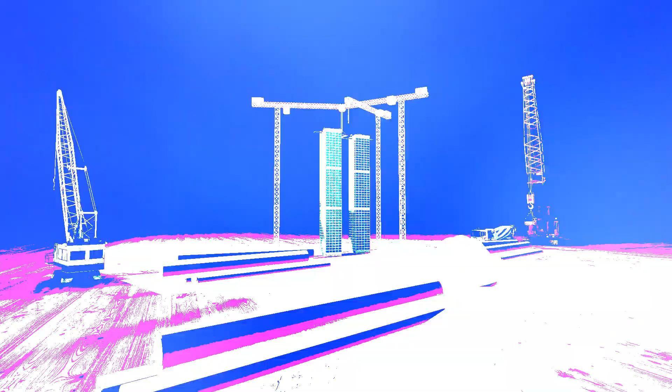Today, we'll be diving deeper into this topic and exploring some other high-cost blunders. So, if you're interested in watching more about the world's most expensive mega construction mistakes, stay tuned. We are sure that you will find this episode to be very informative and entertaining. Let's move on to the video.

It's the stuff of nightmares. When mega construction projects costing billions of dollars go wrong, the consequences can be catastrophic. From towering skyscrapers to enormous bridges, these are the world's most expensive mega construction mistakes, and the stories behind them will shock and amaze you.

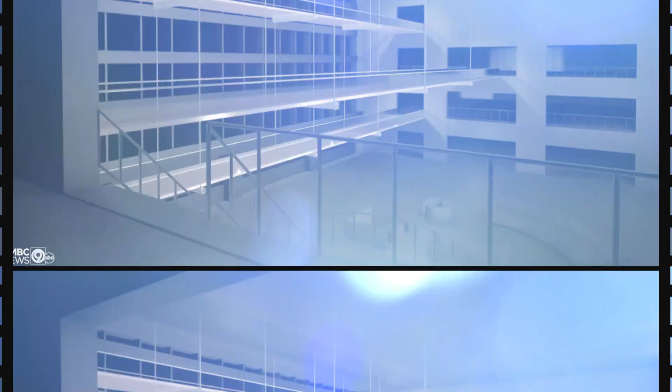The Hyatt Regency in Kansas City, Missouri, was a sleek and elegant hotel that opened in 1980. It boasted a multi-story atrium with 3 suspended walkways running through it, anchored by 1.25-inch steel rods. Unfortunately, an error in the construction process went unnoticed, resulting in a catastrophic event.

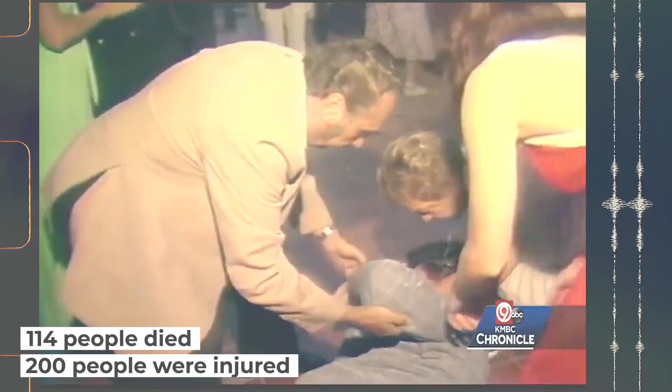On July 17, 1981, the 4th floor elevated walkway collapsed, resulting in the death of 114 people and the injury of an additional 200 people. The Hyatt Regency hotel owners paid more than $140 million in compensation to those affected by the walkway collapse. The collapse occurred during a Friday night tea dance in the lobby.

Witnesses described a horrific sight, with the walkway falling down onto another walkway 2 floors down, and eventually into the lounge below. Local police chief Norman A. Caron said it was the worst disaster in his 25 years as a police officer. The cause of the tragedy was an engineering error in the design of the walkways.

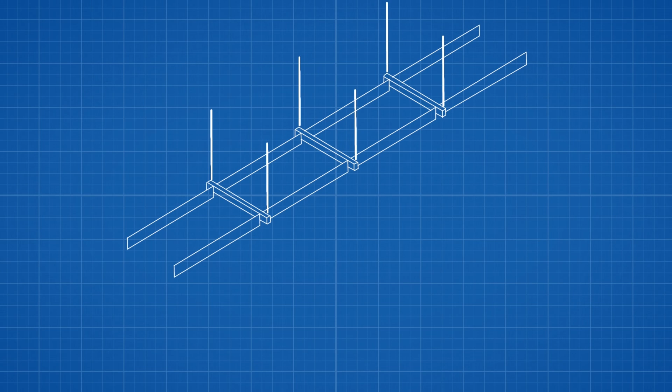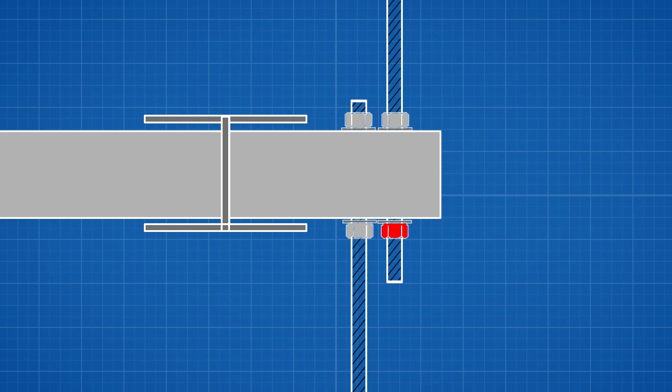In an effort to save money, the design was changed from a single set of hanger rods threaded through the upper walkways to a double rod system that was anchored to the upper walkways themselves, adding immense and undue stress. Unfortunately, this change was not noticed before the walkway was built, and the design was not able to meet the minimum safety requirements.

The event at the Hyatt Regency was a tragedy that should never have happened. It serves as a stark reminder of the importance of safety and quality control in construction. It also serves as a reminder of how a seemingly small oversight can cause disastrous consequences.

The John Hancock Tower in Boston is a prime example of a mega construction mistake. Initially, the plans for the tower prompted public outcry due to its shadow being cast over Trinity Church. Despite a redesign of the building, this did not prevent further issues. During construction, the blue reflective glass used on the building started to fall off from various heights, forcing police to close off the area around the building.

Subsequent research in wind tunnels identified additional integrity issues, such as twisting in high-power winds. The real issue, though, was that the building expanded and contracted wildly due to differences in temperature inside and outside of the building. The reflective material caused the glass to be stiffer than expected, and instead of absorbing motion, it transferred it and simply shook out of place.

All 10,344 window panes had to be replaced with single-paned, heat-treated panels, driving up the cost of the project. During the time it took to identify and fix the problem, sheets of plywood replaced many of the missing panes, earning the tower its nickname of Plywood Palace.

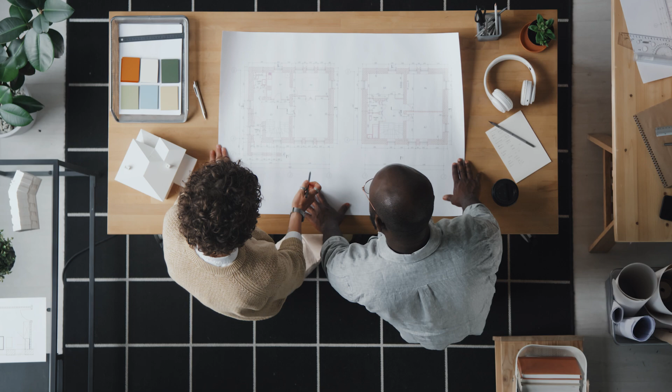The John Hancock Tower ended up costing $175 million, making it one of the most expensive mega construction mistakes in history. Despite the costly errors, the tower still stands today as a testament to the power of human ingenuity and engineering. It serves as a reminder of the importance of investing in proper research and testing before embarking on a construction project. The John Hancock Tower is a prime example of the costly consequences of cutting corners.

The Kemper Arena in Kansas City, Missouri, is another of the world's most expensive mega construction mistakes. The arena was built with a price tag of $39 million in 1974, but its lifespan was cut short after just a few years when the roof collapsed in 1979 due to poor design and engineering.

The arena was hailed as an innovative design at the time, but it was ultimately doomed by a case of form over function. The roof was flat, which raised some concerns as to how it would handle the weather. As such, the design included a temporary reservoir to reduce stormwater runoff, but it only had 8 drains, despite local code requiring at least 8 times as many. As a result, the reservoir could only contain 2 inches of rain before overflowing. On the night the roof collapsed, a storm dumped more than double that amount of rain.

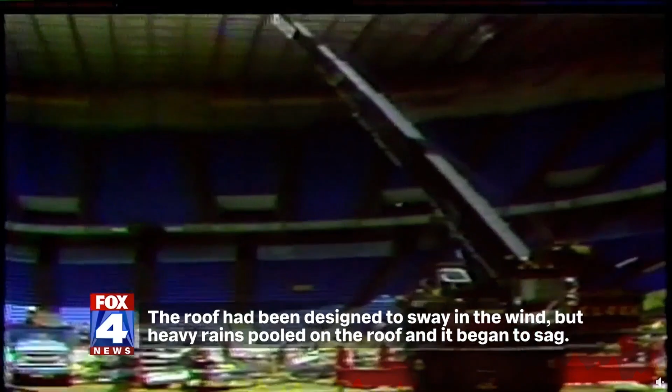The collapse was so violent that pressure from the falling roof blew out some of the walls. The damage from the collapse was so severe that the arena was closed for repairs for more than a year. After the repairs were made, the arena was reopened in 1981 and renamed the Kansas City Community Arena. It was eventually renamed again in 1988 to the Kemper Arena.

Since then, the arena has hosted a number of sporting events, concerts, and other events. It has also been remodeled several times over the years and is now home to the Kansas City Mavericks, a minor league hockey team. Despite the changes, the arena still serves as a reminder of the dangers of form over function in construction. The collapse of the Kemper Arena has been estimated to have cost more than $20 million in damages, making it one of the most expensive construction mistakes in history.

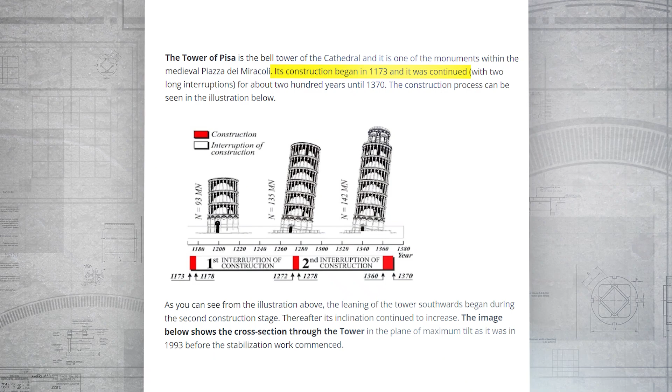The Tower of Pisa, otherwise known as the Leaning Tower of Pisa, is one of the most renowned and recognizable structures in the world. The total cost of the project exceeded €30 million. This iconic building stands as a testament to human ambition, as well as a reminder of the importance of proper engineering. The tower was initially constructed in 1173 as the bell tower for the Pisa Cathedral complex, and was intended to be an 8-story structure.

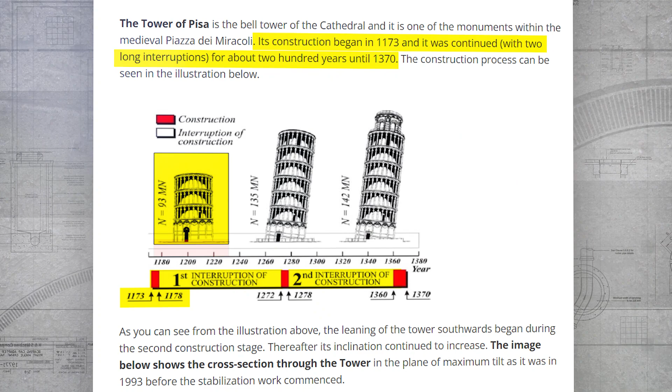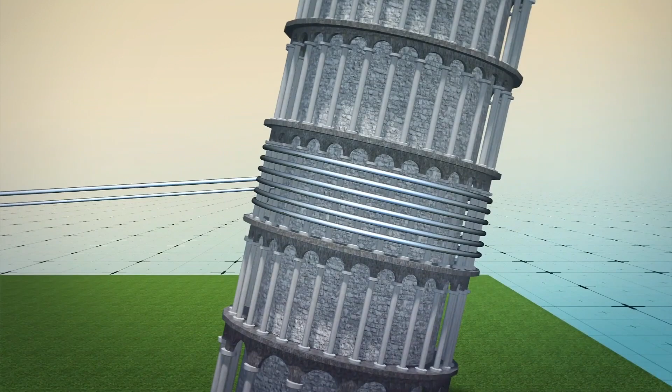The architects, however, made a grave error in their construction. They built the tower on a foundation of only 3 meters deep and on a soft clay bed, rather than a sturdier foundation. This mistake caused the tower to begin its famous lean only 5 years after its construction began. The lean of the tower has only increased over the years, and by the 1990s, authorities deemed action necessary. To prevent the collapse of the tower, 600 tons of counterweights were added to the base. This managed to stabilize the structure, however the tower still stands at a lean of 4.5 degrees.

The tower's long-lasting fame has made it an incredibly popular tourist attraction, as well as a symbol of Italy and its culture. Despite the mistakes made in its construction, the Tower of Pisa has withstood the test of time and has become a beloved landmark. The Tower of Pisa is a reminder that even with the best intentions and the most ambitious of plans, mistakes can still be made. It stands as a reminder that proper engineering and construction techniques must be utilized in order to avoid costly and disastrous mistakes. The Tower of Pisa is thus a valuable lesson in the importance of taking time and care when constructing large and ambitious projects.

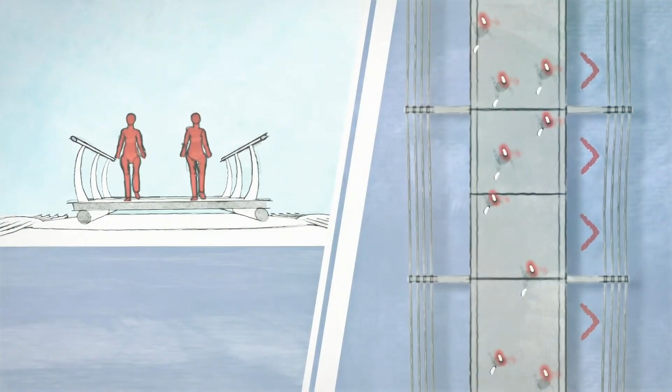The Millennium Bridge in London is one of the most expensive and notorious construction mistakes in recent years. The Millennium Commission funded the construction of the bridge to the tune of £18.2 million. The bridge was opened in June 2000 as a pedestrian link over the River Thames, but it was found to sway and shake when more than a few people crossed it. The issue was so severe that the bridge had to be closed down only 2 days after its opening. It took 2 years of corrective measures before the bridge was allowed to reopen in 2002.

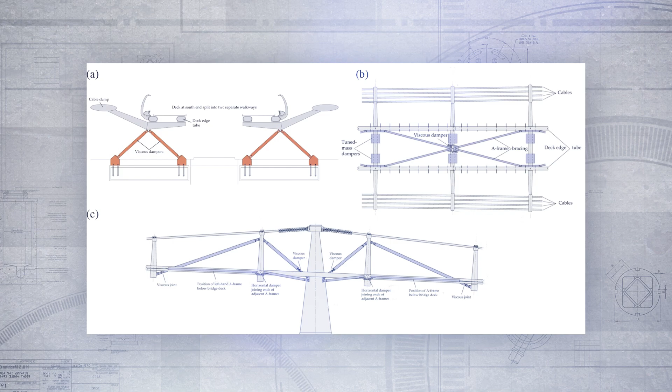The Millennium Bridge was designed by Arup engineers, and was the first new bridge to span the Thames in over a century. It was intended to provide a pedestrian link between the north and south of the city, and also act as a major tourist attraction. The bridge was constructed using suspension cables and steel girders, and featured a unique curved shape. However, the design was flawed, in that it did not account for the added weight of the pedestrians on the bridge, and caused the bridge to sway from side to side.

This caused a sensation in the media and amongst the public, and the bridge was quickly closed down for safety reasons. Arup engineers then had to undertake a lengthy process of modifications to make the bridge safe for pedestrians. This included installing dampers, adding cross-bracing to the structure, and changing the shape of the bridge.

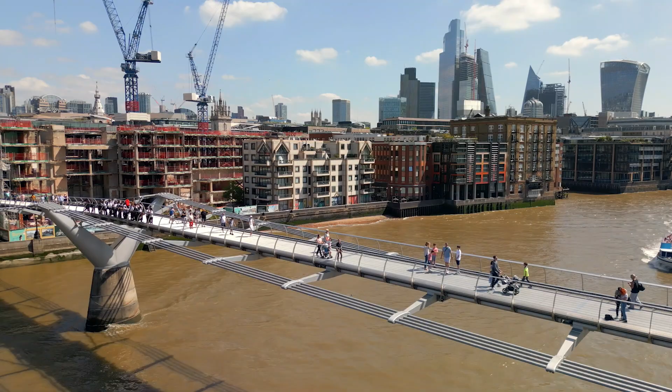The Millennium Bridge has since become one of the most iconic and well-known bridges in London, and is a popular tourist attraction. However, it will always be remembered as one of the most expensive and embarrassing construction mistakes in recent history. Not only did it cost millions of pounds to rectify, but it also caused immense embarrassment and disruption to the city. It serves as a reminder that even the most experienced engineers and architects can make mistakes, and that careful consideration must be taken when constructing a large-scale structure.